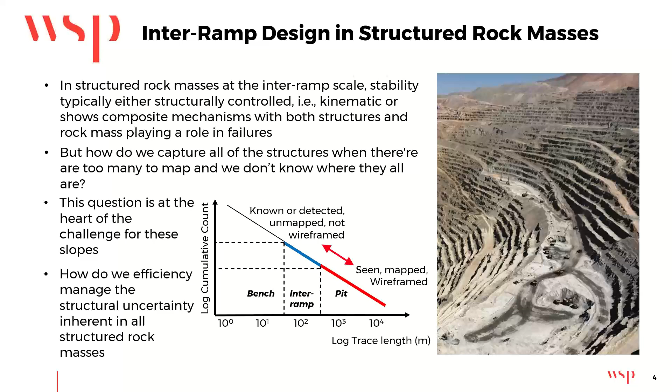So these are some of the challenges we're trying to unpack a little bit today, in terms of how we can actually try to represent a structure that we know is there, but is kind of hard to explicitly represent. And in particular, how do we manage a lot of the uncertainty around that structural fabric?

Now, in terms of how we currently address inter-ramp slope designs, there's really four broad methods, and they all have advantages and disadvantages. I'm not going to dwell too much on those, but just to summarize, we have simple kinematic methods like SWedge, which many people have used for simply computing the kinematics on a wedge. We have limit equilibrium solutions in 2D or 3D, very fast, but perhaps not so good at handling a fabric.

We obviously have some amazing numerical codes, and some wonderful modeling is done with codes like FLAC 3D or 3DEC, with 3DEC embedding major structures. And of course, we have some DFN based methods, something I myself have been very familiar with. But there's no one perfect solution, and that's really where we're starting from today.

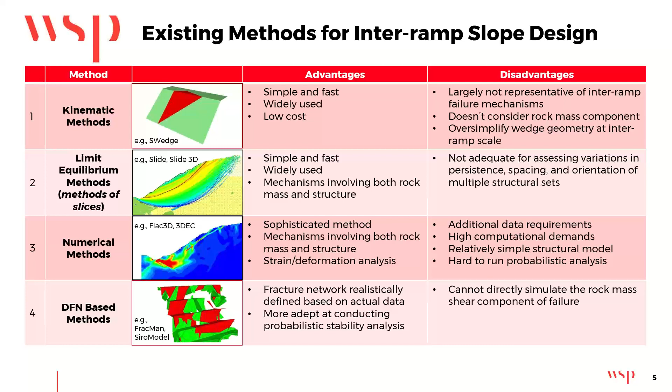So we were motivated to find an efficient approach that would allow us to perform both back analysis or forward predictive results in a timely manner, knowing that some of the more heavyweight codes would struggle in that area. So what we're looking for is a method that allows us to handle structural complexity, that allows us to consider both a structural and rock mass component, to sweep through a range of different property sensitivities. We want something probabilistic, that we can run lots of times in short run times. So that's really some of the motivations behind this code that we call 3DPOF.

And we want to achieve this quickly so that we can actually aid in solving operational issues, help develop mitigation efforts where necessary, and evaluate true slope risk. So that's a little bit of background to FracMan and the DFN 3DPOF solution.

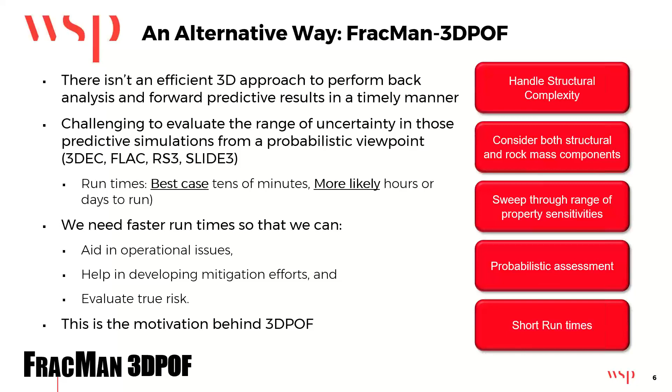But let me just start first of all, for those people who are perhaps less familiar with discrete fracture network modeling, by giving a little bit of background to that. So the idea in DFN modeling is we're going to explicitly represent critical structure. What we're going to do is transform geological and geotechnical information into quantitative parameters that describe our fracture network, with the aim of generating geologically realistic DFN models of our data that we can then analyze.

It's a stochastic process, which basically means the properties are drawn from distributions, whether that's orientation - so obviously we don't draw from a histogram like here, that's a stereonet - or we draw from a histogram or some distribution of size and intensity. I've noted at the top right, on those structures we can also have distributions of properties like cohesion or friction angle, permeability, stiffness, whatever we want. But these aren't critical properties. The main properties we need to define for our DFN model are fracture orientation, size, intensity, and spatial variation.

And we kind of do that either on a family by family basis, or perhaps all together - it just really depends on the application. If we look at this little example on the right, imagine we have a slope, a stack of benches. We have some borehole data giving us an intensity of structures seen in the borehole. Maybe there's a televiewer log, so we have some orientation, and mapping on the benches gives us some size of structures.

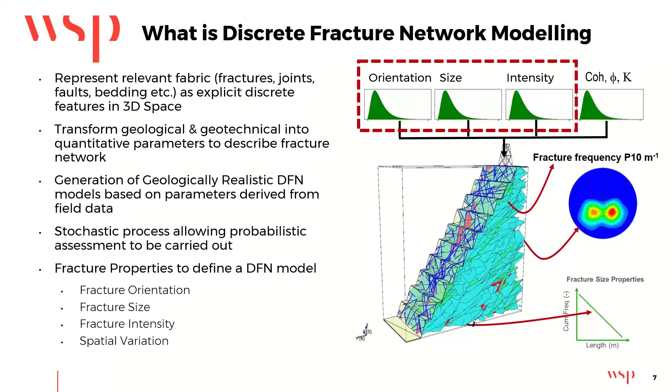And remembering, because it's a stochastic process, we can carry out a probabilistic assessment. So we can build these models hundreds of thousands of times if necessary, with each realization being equiprobable, and then we can look at the distribution of results at the end.

Now, lots of people will be familiar with DFN modeling of old, which was very simple in many ways - what I would have called the crack in the box approach, where we just put DFN fracture objects into a volume. Of course, now DFN modeling is a far more geomodeling based approach, where we actually have the ability to model much more complex fracture architectures.

So just considering some of these cartoons on the left, we have the homogeneous model, which we might consider the crack in the box, but now we have the tools and techniques to model ordered layer bound systems where the intensity of joints is driven by the bed thickness or bed heights. We have deformed systems with lots of folding or faulting and clustering. So there's a range of different fracture architecture styles that we can incorporate into those models.

And we want to make sure - I'm a pragmatist, so simplicity comes first. But if the particular geology of the slope requires it, we have the tools to do that.

Just a couple of examples on the right. A very layer bound jointing system with then through going shear fractures up in the top right, and then the image on the bottom right actually shows how bedding faults have been simulated to follow the limestone beds that you can just see in light blue. So the trend of the simulated bedding faults is actually moving through space as it follows those beds.

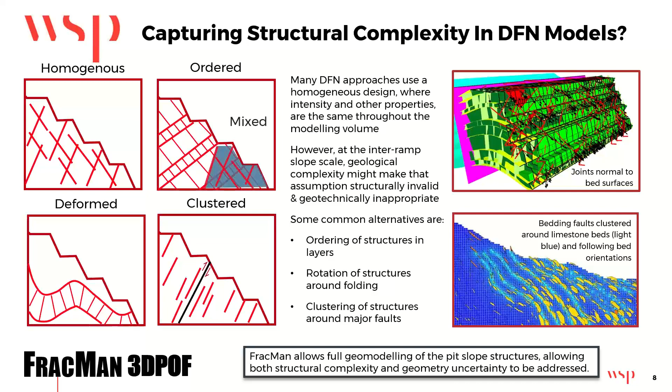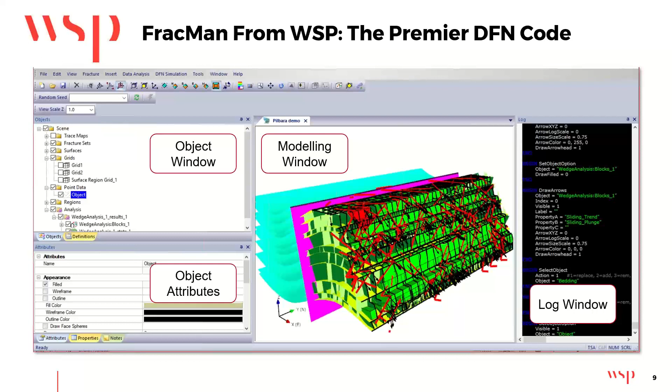Okay, just a quick look for those who've perhaps never seen FracMan before. FracMan is a software developed from within WSP, probably the premier and certainly the initial, the first commercial DFN code available in the marketplace. Please do reach out if you'd like to know a little bit more about that, and my contact details are at the end of this presentation.

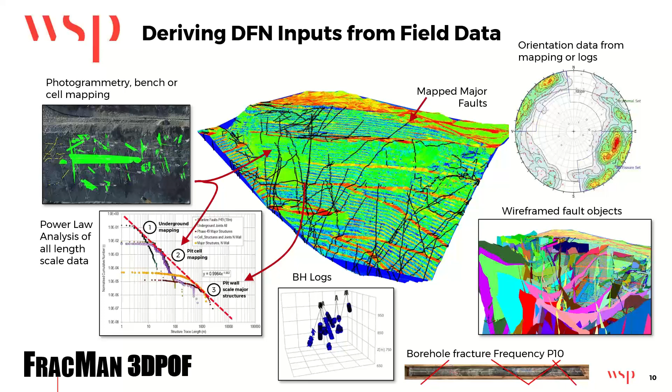And I'll look at later just some of the ways perhaps we can add a little bit of complexity into that. Now, when we're thinking specifically about interramp analysis, we're thinking about a stack of benches and what is an appropriate interramp slope angle that we can support for that.

And so we build this ex situ model with, in this case, three different fault trends. This is actually some work that's talked about in the paper, please do download a copy. This was from Bingham Canyon. There were three different fault trends: bedding, normal, and fissure trends.

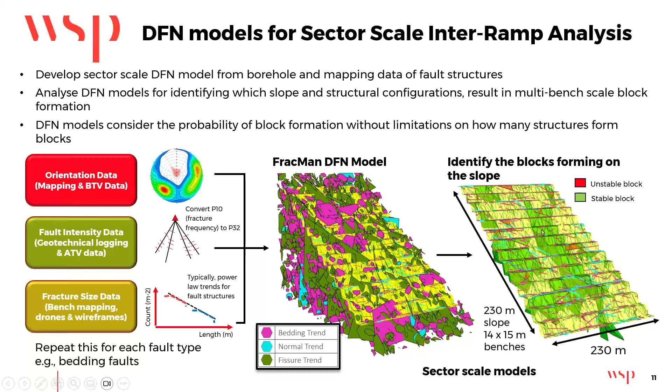But this is the process: data analysis and characterization, DFN model generation, and then block identification. When we look in a little bit more detail at the blocks that are actually forming on the slope, we kind of see three broad types of blocks.

So we've got up here in the top left, just a simple one to two bench, it's a simple wedge. In this particular case, it's kinematically stable. Down here in the bottom right, there's B. It's a one to two bench simple wedge, and that's kinematically unstable.

But what we're really interested in is these large multi-bench volumes, what effectively are non-daylighting wedges. So they're wedges that are nearly always kinematically stable, because the shape of them means them moving is not kinematically easy. It's not just a simple calculation of sliding resistance.

They're usually held stable because they're sitting behind a buttress of rock mass at the toe of the slope, or perhaps laterally, or even just the overall shape of the wedge means maybe it's like an hourglass. The shape means it doesn't want to move.

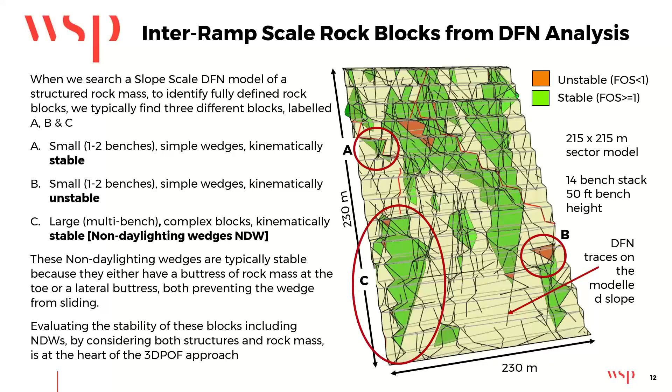And really, so it's evaluating the stability of these non-daylighting wedges that's at the heart of the 3DPOF approach.

So let's dig even deeper into one particular wedge. So here we actually have a non-daylighting wedge. It's about 140 meters long in total, covers about five benches, and you'll see on this figure here, the red lines actually represent the trace of major structures on the slope.

So you actually see that it's partially formed by these major structures, but the blue and green smaller fractures represent the stochastic fabric that we've added, in this particular case constrained from borehole data.

So you'll understand, and what we've really learned over these last few years is that these large non-daylighting wedges are typically defined by this combination of major structures and intermediate structures. Major structures on their own often don't fully enclose the volume, and we really need this other fabric.

Now, if we look at this particular wedge from the side, you actually see, so when we look down, it kind of looks like it just wants to come out, but you'll actually see it's sitting behind this buttress of rock mass. So therefore, any failure, if that block wants to move, it's going to have to involve both some kinematic sliding and failure of that rock mass buttress, and that's what 3DPOF is actually going to compute.

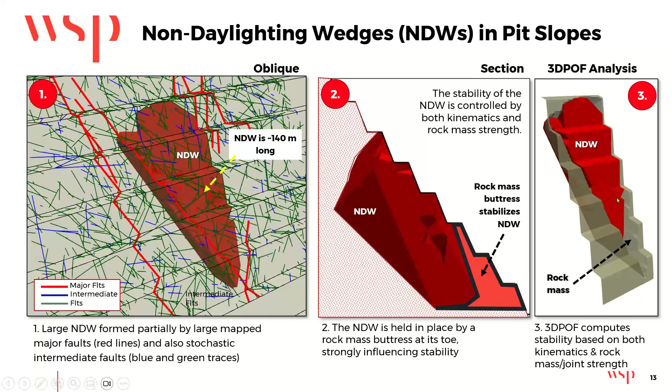So for every block, we're actually going to look at how we're going to calculate the factor of safety of that wedge, considering both the sliding component, and also the failure of the rock mass. In this particular case, I've turned off the rock mass, but that's going to have to fail through this buttress.

How 3DPOF actually looks at that, let me dig in a little bit deeper. So we generate, let's say on a sector scale model, we'll run 100 realizations. We'll be generating somewhere between tens, even hundreds of thousands of these blocks in FracMan, and they're taken into 3DPOF, and it's going to compute the factor of safety considering joint and rock mass and pore pressure inputs.

Now, of course, how we compute that is very simple for us if we were just looking at a relatively simple wedge, but for more complex wedges, we actually have to consider a variety of different potential failure pathways.

So let's just look at this block here. In the image we have here in the bottom right, it's a more complicated shaped block, taken in sections. So you actually see here's a bedding fault it's actually sitting on, and it's also comprised of a number of other structures within it.

So how we might evaluate the stability of that particular block, an initial one might be here. So we might just consider this as a kinematic block. We'll calculate the factor of safety.

We might consider it including the toe and then this rock mass buttress at the bottom. So the custom slip surface within the code is taking the block to daylight out, and then that's how we define the rock mass component and compute the factor of safety. We might actually take this small part of the block at the top, again with this small buttress, and then lastly, it also has the ability to consider, we'll call them notches, but if there's sort of topography in the basal plane, we're handling that.

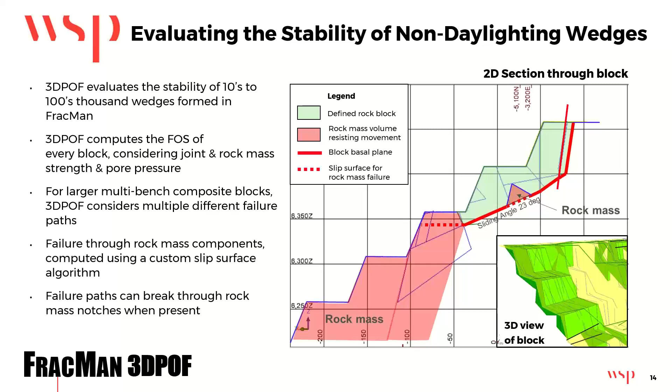So 3DPOF is stepping through these potentially hundreds of thousands of blocks, and running multiple scenarios to generate this large database of factors of safety as a function of different input properties. So of course, when we run these analyses for each block, we don't just want to run it once and throw it away. One of the things we said right at the beginning is we really want to be able to consider a whole range of property sensitivities. And so this is what 3DPOF does.

We set up a table of scenarios we want to test. Perhaps we want to test base case rock mass strengths and some lower bound strengths, some low friction angle joint strength, some cohesionless cases. And in addition to all of those, we will always sweep through a full range of pore pressure conditions. Now, we use this term RU. For those people that aren't familiar, RU is effectively the ratio of the weight of water to the weight of rock. So an RU of 0.4 effectively is hydrostatic conditions, or approximately 0.4. Obviously, not all rock has a density of 2,500 kilograms per meter cube.

But if we look at this particular case here, this wedge with an RU of 0, so dry conditions, has a factor of safety of 2, and as the RU increases, we see the factor of safety falling all the way down to when, at an RU of 0.2, we got a factor of safety of 0.6. So here we actually see all of the results. The big dots just represent these cases shown above. Clearly emphasizing how important water management is within slopes, with so many instabilities being primarily driven by, or certainly triggered by, high rainfall events, or the loss of water management and ponding water forming on slopes.

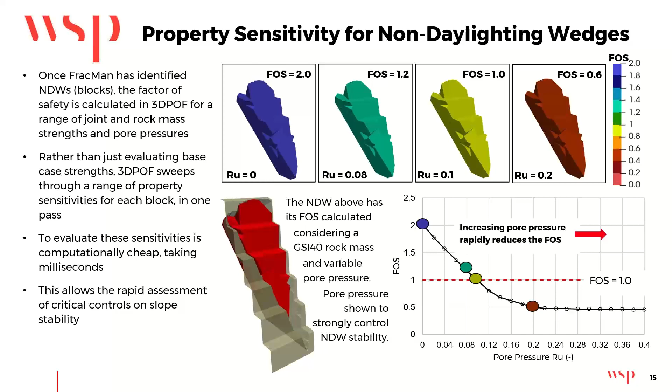Okay, so how do we actually use this within the design process? Remember, we're going to build our DFN model. We're then going to take the blocks and calculate the factor of safety for all these blocks. And we're going to repeat this for a range of interramp angles and slope orientations. Then based on those results for each one of the designs, we can calculate the probability of failure, which we take as the volume of unstable blocks divided by the volume of all blocks. The results can be compiled into design charts where we have interramp angle on the base against the probability of failure, with the two DAC lines of a 10% or a 5% POF drawn on the graph.

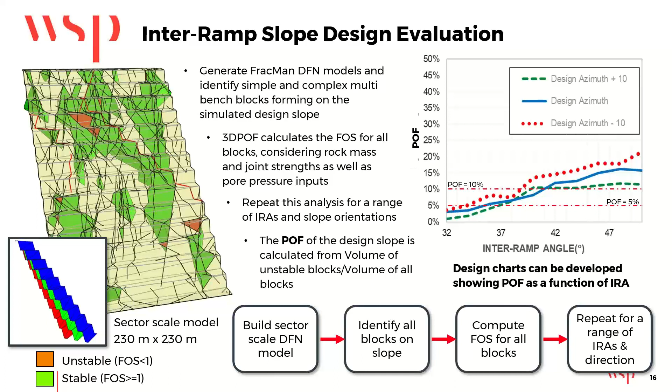Okay, so it's actually pretty simple. It's really about the DFN model, then generating the blocks, evaluating the stability of the blocks, and then looking at the volume or the tonnage of potential instability for different designs, and then coming up with a probability of failure criteria. Of course, that's a simple sector scale model. As I said, that was really ex situ. It doesn't have to be in the real world, so to speak.

But here we can also build a model scale result, and that's really important because the sector scale models will help in defining appropriate interramp angles for a sector. But we really need a way to test the final design. In particular, we have to look at what's actually happening at sector boundaries. Sector boundaries are so often defined by major structures or contacts, faults, dikes, change in lithology. So often lots of interesting things, and by interesting I mean unfavorably exciting events.

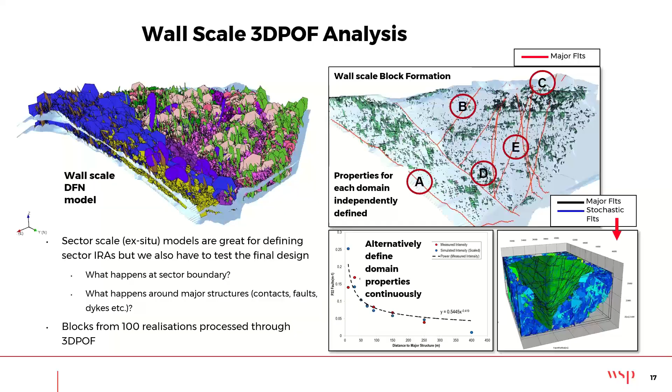Some other properties that we use, a common one is block failure percentage, which is really a kind of pseudo probability of failure, because what we're looking at is the count of failing blocks in a cell divided by the count of total number of blocks in the cell. So there's a variety of things we can do. And in fact, we're just completing a study at the moment where the correlation between high block failure percent and historic failures is just amazing.

It's just had me purring for the last couple of weeks. Big shout out to the team for that.

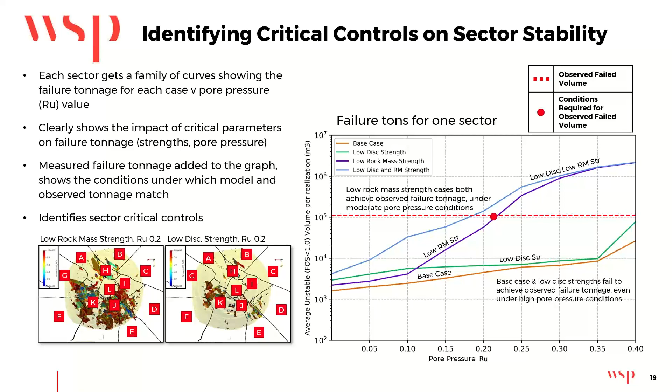Whereas when we look at the same DFN model, but this one is the low discontinuity strength and an RU of 0.2 again. It's a much stronger case, and you see that's the difference between the green line here, where we got not a lot of failure, compared to this purple line, much more failure. So it's just a great way to be able to identify critical controls on sector slope performance.

Okay, so we're just about at time. Just some takeaways for you: I think DFN modeling is a wonderful way to provide a structurally sensible approach to capture structure and embed it into our analysis, because it allows us to add this scale of structures that we know are there and we know are important, yet perhaps too numerous to include explicitly as wireframed objects.

And we're using some underlying geology and fracture modeling techniques to efficiently geomodel that fabric, rather than just to put it in as some implicit structure. And then we can consider the interaction between those different structures, using the kinematics to effectively assess the block formation within the slope, and think about also the probability of occurrence.

This is really important. We want to get away from this idea of the possibility of occurrence and think about the probability of occurrence. Then 3D POF is then processing those blocks to actually identify the factor of safety, considering this composite failure mechanism of both sliding and rock mass failure, including property sweeping through all of these different